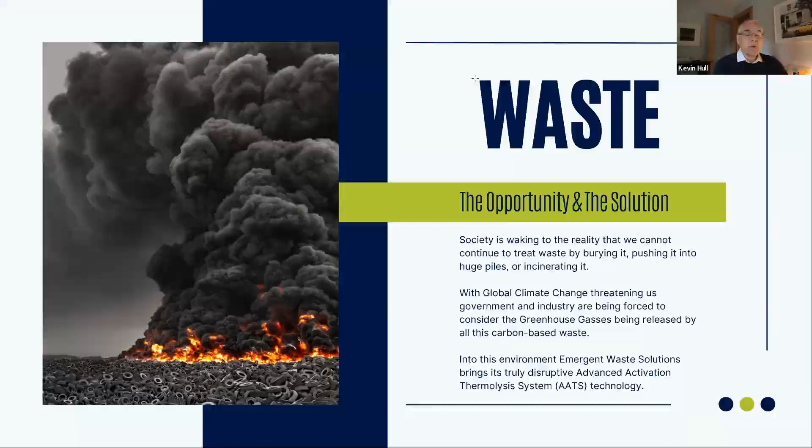So what is our solution? Thermolysis, oftentimes called pyrolysis. Thermolysis can bring us near zero on the emissions side. It takes place when a carbon-based material is subjected to a very high temperature in the absence of oxygen. So without the oxygen, there's no combustion, there's no incineration. But that high temperature acts on the material to crack it at the molecular level, splitting it into the three constituent elements of a biogas, a biooil, and carbon.

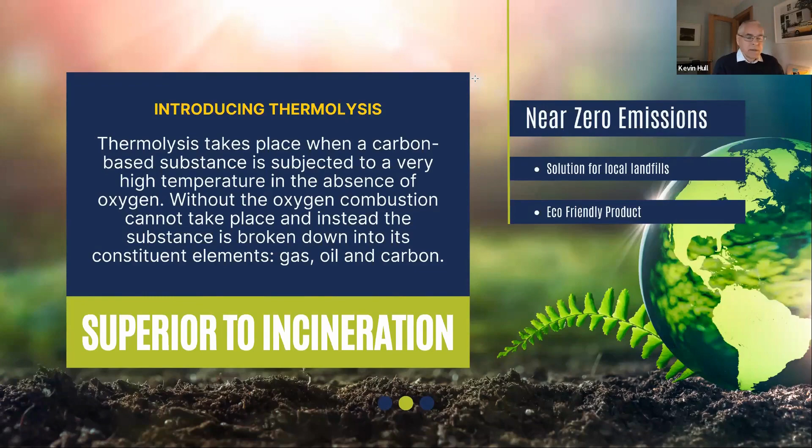EWS is Canadian owned and managed, and our technology is among the best in the world. It was developed over a 25-year period. Earlier generations of the tech have been operating commercially for over 15 years. We are not in R&D, although we continually look to improve, and we're not at the pilot plant stage. Our ATS is running commercially here in Canada, and we've built business cases for projects overseas.

The objective is to process waste before it decomposes and releases all of its gases. Capturing the gases from stack emissions is great, and I applaud the tremendous work that's been done in that area. However, it's somewhat like closing the barn door after the horses have escaped, isn't it? How much better would it be to not put all those gases up the stack to begin with?

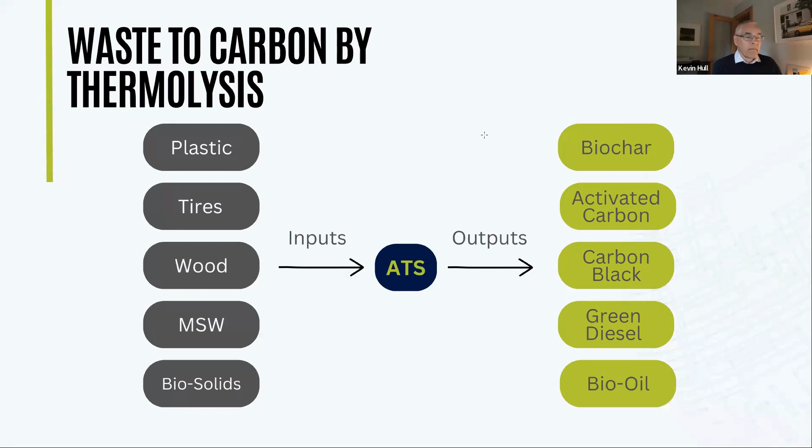So, given our limited time here in this event today, we'll focus on the biochar while making note of the others. Biochar stands to make the greatest impact. We make it in our ATS reactors from every input except the tires and plastics. By making biochar from waste, we can see as much as a 1/3 reduction in GHG emissions right off the bat.

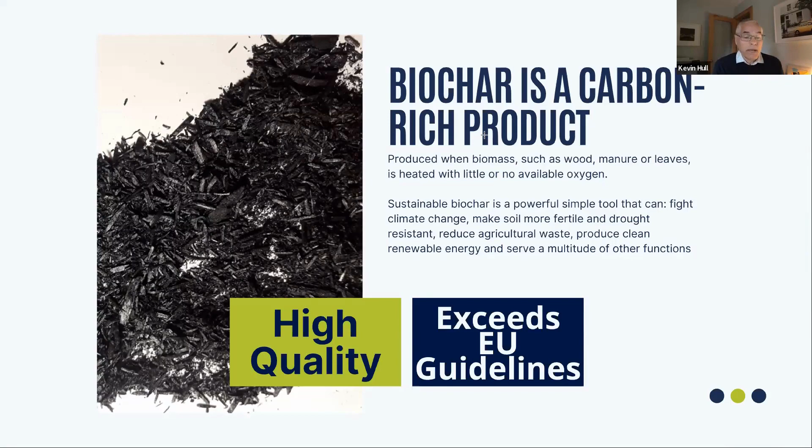And further to that immediate reduction, the application of biochar, particularly in agriculture, can further reduce climate emissions. As an example, when cattle ingest biochar as a component of their feed, their methane emissions can be reduced by as much as 12.5% to 22%. A Harvard study evaluating more than 150 scientific papers on adding biochar to livestock feed showed, in most of the studies and for all investigated livestock species, positive effects on parameters like toxin absorption, digestion, blood values, feed use efficiency and livestock weight gain, meat quality, and GHG emissions.

On his first attempt with his doctoral thesis, the modification did not produce the sought-after result. However, Dr. Amir then learned about our biochar and cured a sample to test at the university lab. He was impressed enough with the purity of our biochar that he asked EWS if we would join him on a grant application to redo his thesis. On this second attempt with our biochar, he was successful.

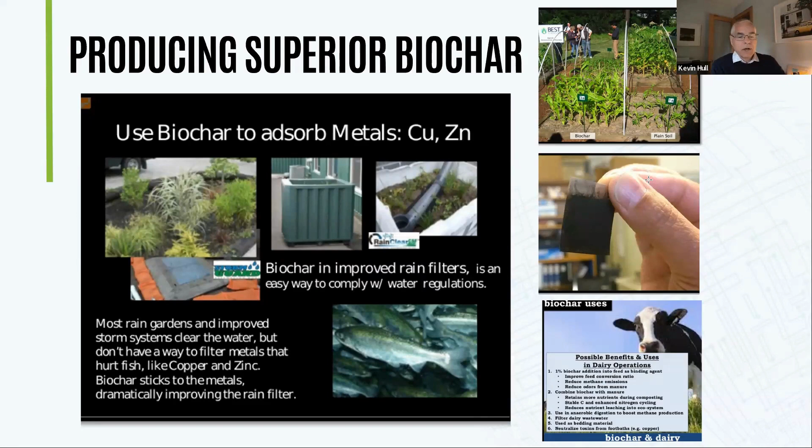Haven't we all been told for decades that the economic impact of tackling climate change is simply too great? Well, if you're anything like me, you also realized decades ago that this is pure unmitigated bullshit. My colleague Brian and I recognized that 14 years ago. Now, there's no question that moving away from fossil fuels and properly managing waste will adversely affect the bottom line of industries that have created billionaires at the expense of our ecosystems. But should that really be our overriding concern when the very survival of our planet as we know it is hanging in the balance?

In the following slides, we're going to look at a number of the major waste streams society creates. To begin with, we look at municipal solid waste, also called MSW. Here we find the opportunity for the greatest positive impact on GHG emissions. Now, interestingly, citizens are calling for a better way of dealing with society's waste, while municipalities and regional districts are unaware that there is a better way.

Composting technology has made great strides, and that's where regional districts and municipalities usually go, which is definitely commendable. However, the very decomposition of organic waste necessary to the creation of the compost results in the GHG emissions we're trying to reduce.

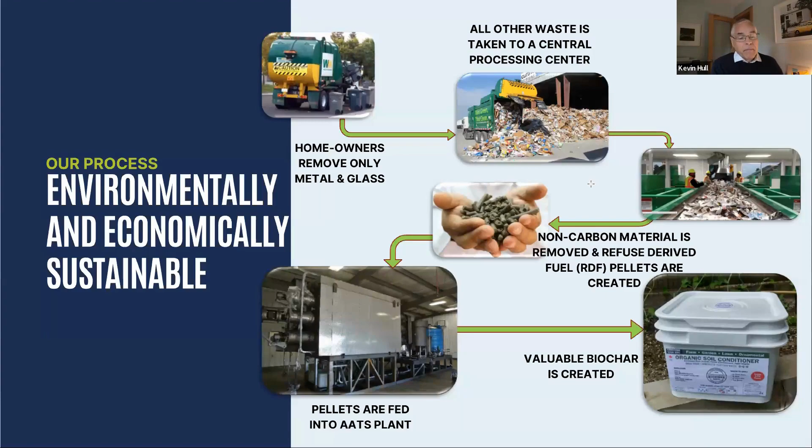The ATS solution is not only viable environmentally, but it's also economically sustainable, if a municipality simply diverts the cost of operating a landfill to paying a tipping fee, in combination with revenue from the products created. We can offer a multi-year solution that will eliminate pollution and significantly reduce GHG emissions.

But going forward, we will not use the syngas for that. Later in this presentation, I'll explain the significance.

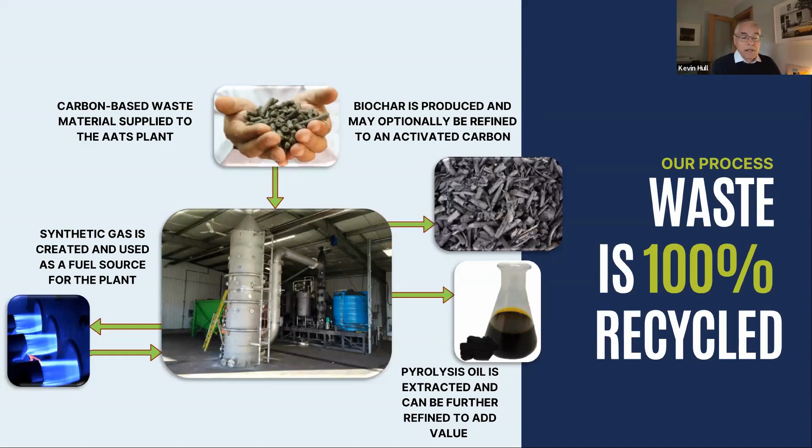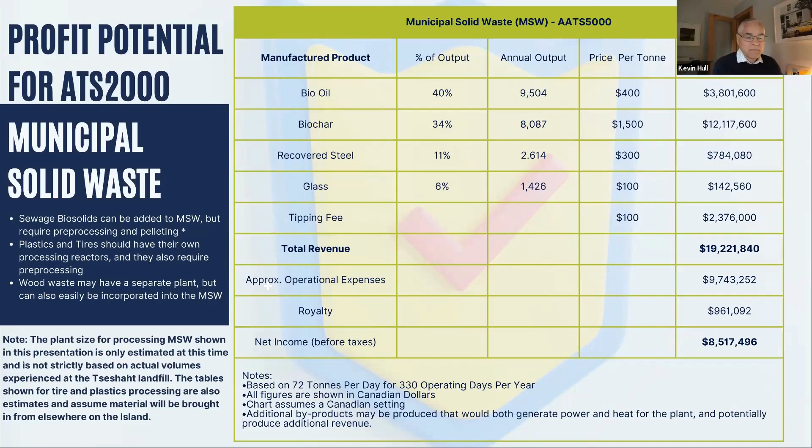Sewage biosolids. Have a read on that screen. Spreading sewage sludge on your land will poison your soil, kill your livestock, and get you sued.

In Canada, we're late to the lawsuit game because, of course, we're Canada. But class action suits in the USA are already gathering momentum. There are very troubling issues surrounding the campaign to sell sewage solids as benign fertilizer. And it should be noted that the decomposition of sewage sludge is also giving off GHGs.

I met with a residuals manager for a prominent regional district here in Canada to present a better way of dealing with sewage sludge. After I explained that the sludge would be subjected to a very high temperature for 15 minutes in an oxygen-deprived environment, this engineer looked across the table and said, 'How do we know what you're doing with it makes it safe?'

Now, in my defense, I should mention the engineer had just gotten through telling me that spreading the raw sludge on rangeland was totally safe.

I looked back across the table and replied, "Well, we don't have any portals on our system where we can introduce pharmaceuticals, chemicals, heavy metals, or pathogens, which is in your raw sewage sludge. So if you're confident in the safety of this sludge, how can you even ask that question?"

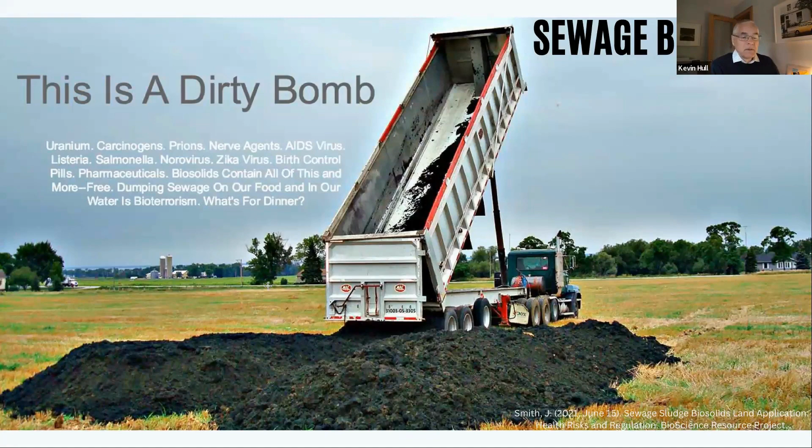A couple of years ago, I created a document that lays out the current way that sewage sludge is handled and why that is problematic on several levels. In my paper, for the section on current practices and their dangers, I borrowed from the work of Dr. Marilyn Cameron, a well-respected Nova Scotian doctor and a founding member of the organization No Farms, No Food.

So the knowledge is coming. Organizations and groups like the ones who have hosted this event today know what's going on.

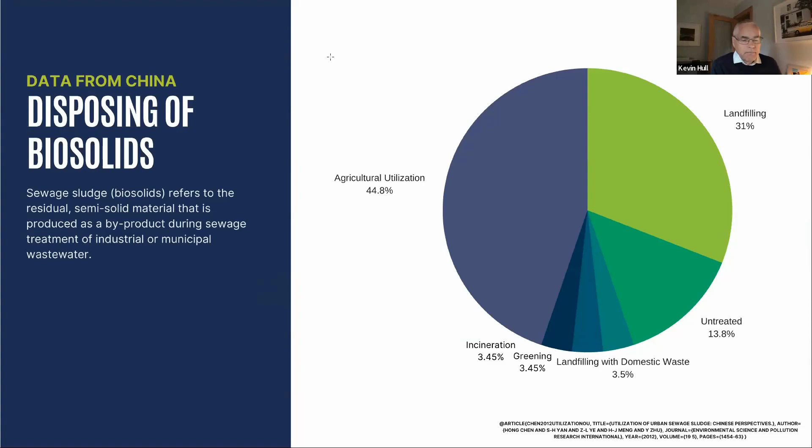I found studies published from 5 different countries and 9 different universities, each of them reaching the conclusion that the best way to deal with sewage sludge is by way of pyrolysis. Composting did not get a mention.

One of the interesting things you'll see from these clippings here is that heavy metals are actually trapped in the porous structure of biochar. And where plants were grown in biochar created from the sewage sludge, those heavy metals were not absorbed by the root systems and taken up into the stalk and the fruit of the plants.

Interesting also, on the right-hand side here on this screen, from the UK, 17 of the most thermally stable pharmaceuticals were tested in the trial, which revealed that thermolysis technology destroys over 99% of 10 of the pharmaceuticals and an average of 94% of the remaining 7.

So we have not only a reduction in GHGs if we process the sewage sludge properly, but a healthier environment all around.

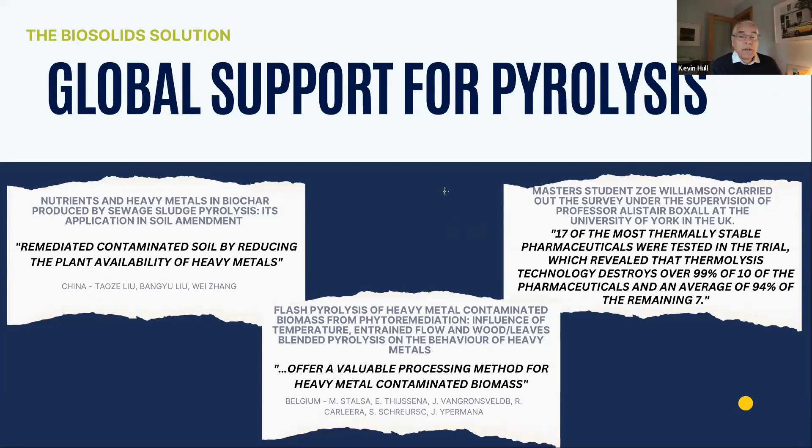I grew up, as many Canadians have, in a logging town. I remember fresh snowfalls that became black with fly ash within days. We never thought anything about it. It was just something we put up with for the sake of well-paying jobs and a good place to live.

However, we've come to since realize the true hazards of living with wood smoke. And ironically enough, with forest fires exacerbated by climate change, people in major cities have also come to realize it. But we've still not come to a full realization of what wood waste is contributing, because quite apart from the health impacts of wood smoke, wood waste that is buried, used in compost, or applied in landscaping is still decomposing and giving off its latent GHGs.

ATS plants can make valuable biochar from wood waste and prevent as much as 1/3 of those GHGs from being released.

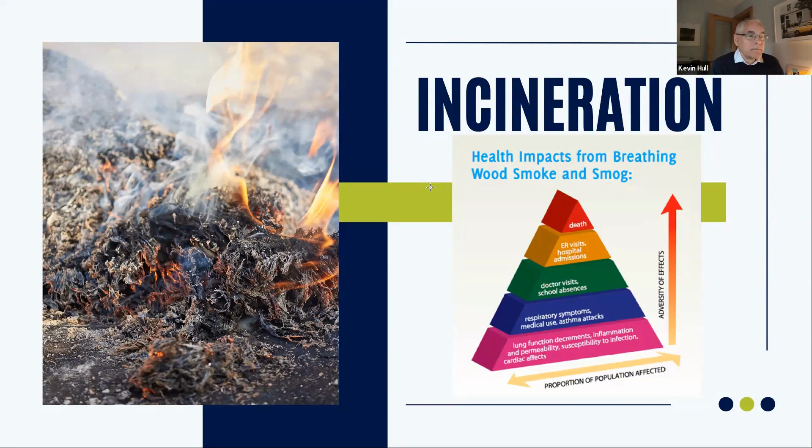Plastics. Every day it seems there's a new story about how plastics are causing serious stress to our planet. Whether it's wildlife that's ingesting plastic and dying, or carpets of plastic blocking the sun from waterways and adversely affecting the ecosystem, or the microplastics that are now being found in the organs, bloodstreams, and brains of people, we know that plastics are a scourge.

But it doesn't have to be this way. ATS can take virtually all types of plastics and create a light diesel product that can further offset the extraction of new fossil fuels.

So we have a means of dealing with plastic, and it's now simply a matter of the will to do something about it. And with ATS, plastics become, again, economically sustainable in their recycling.

So there's really no excuse for the way we dispose of our plastics. I show you this map because EWS has targeted some projects in Philippines, which has, for a small geographically sized area, a lot of impact on plastics.

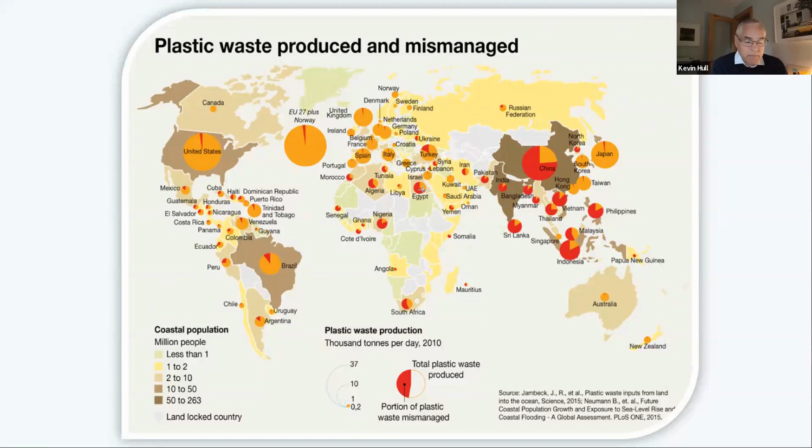So we have a shovel-ready project in Philippines. It's waiting on financing, but we're ready to make an impact there. And again, speaking about the economic viability of properly processing plastics, this will only get more profitable as time goes on because the price of fuel will go up.

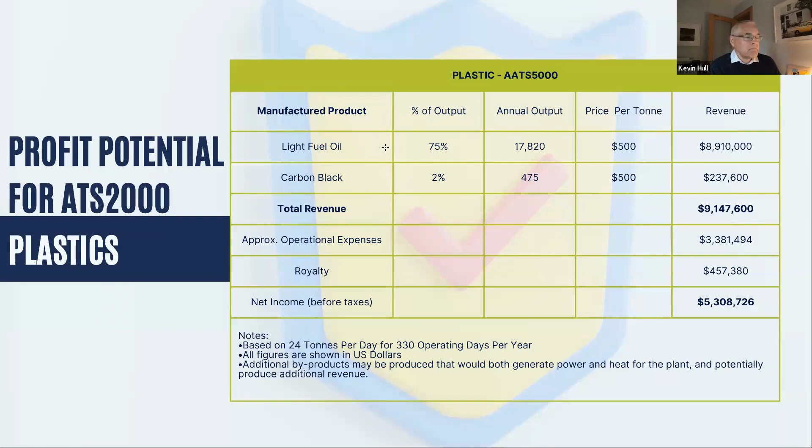And now we come to tires. I think we all understand that waste tires are a blight on our landscape. Seeing the tire dumps and the stacks of tires. And when they catch fire, these tire dumps can burn for years.

What you might not be aware of is that the elements that have gone into the tires also contribute to GHG emissions. Carbon black, a material derived from fossil fuels, is added to rubber compounds to give it better wear and flexibility. This material has a very high carbon footprint in its creation. But with ATS, we can recapture that carbon black and return it to the supply chain. We can also recover oil equivalent to a number two home heating oil, and we recover biogases.

And I want to emphasize something here. The current practice of simply crumbing the tires and putting it on children's playing fields or in landscaping applications is not a solution to the problem of waste tires. The tire crumb degrades from exposure to the elements and the friction of being played on and becomes a toxic dust for the children to inhale as they play.

So we did some research and found the studies and verified that, and that can be shared.

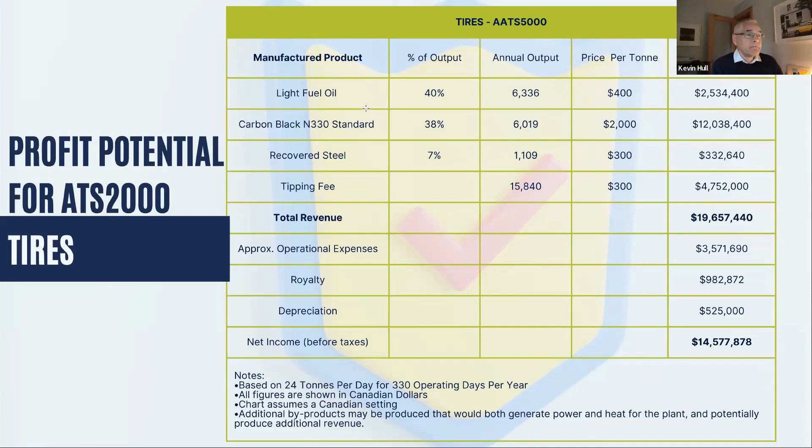Biocoal. Sometimes you'll hear biocoal used to refer to simply a pelleted bit of wood waste. But that's not really what biocoal is.

Talking about biocoal, unfortunately, it's not realistic to expect that we will shut down all the coal-fired power plants in the world all at once. But until we do reach that point, EWS can create a product that reduces climate emissions while allowing existing power plants to keep functioning. Now, please let me be clear here.

I am not saying that burning fossil fuels is necessary or that we should coddle the coal and coal burning industries. With alternative energy sources, coal can be replaced tomorrow. We know that. However, realistically speaking, that's not going to happen. And so we offer a means of reducing emissions during the transition period.

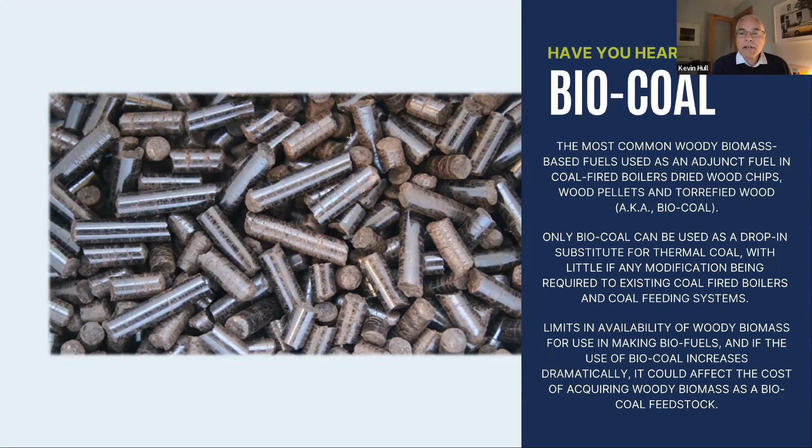As we come near the end of the talk here, just a couple more slides left, I want to point out that the ATS technology itself is not in question. It's not, does this work? Will it work beyond the lab? Will it work on a commercial scale?

This month, EWS signed a memorandum of understanding with a technology company in Southern California that defines a technology cooperation relationship. Hago Energetics has developed a means of taking the biogas created by our ATS and making methanol from it.

And a cubic liter of methanol has more hydrogen molecules in it than does a cubic liter of hydrogen. Sounds counterintuitive, but the reasons come back to hydrogen is a real bugger to work with - to create it in a green fashion, so you're getting more out of it than you got in, and to containerize it and transport it, store it, and then deliver it to the device that needs that fuel.